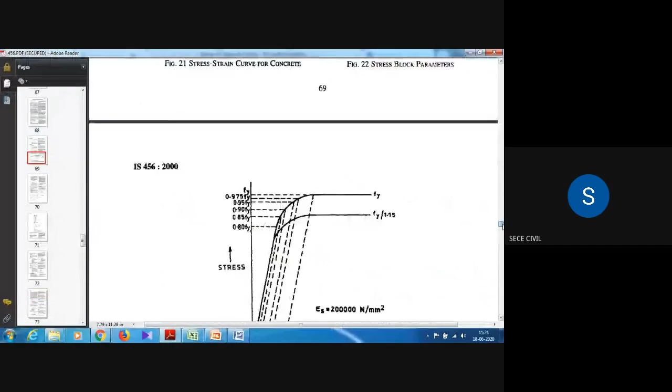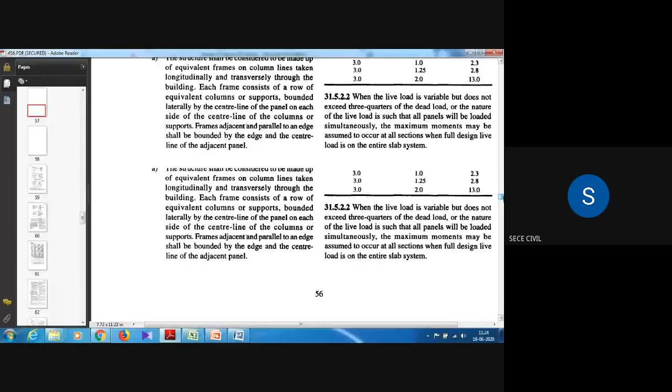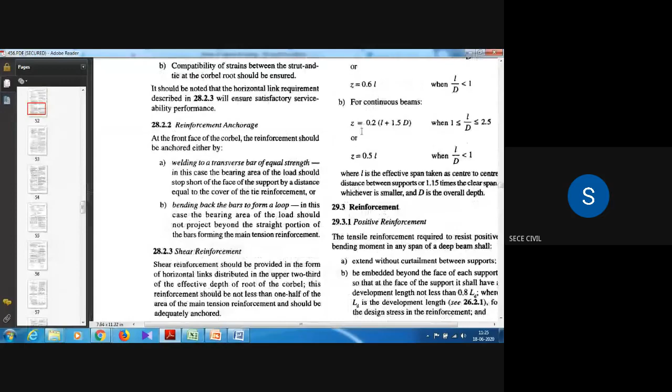So as per IS 456-2000, clause 26.5.3.2, we have certain norms for providing ties. I will show you that in the code book. Clause 26.5.3.2, here: pitch and diameter of lateral ties.

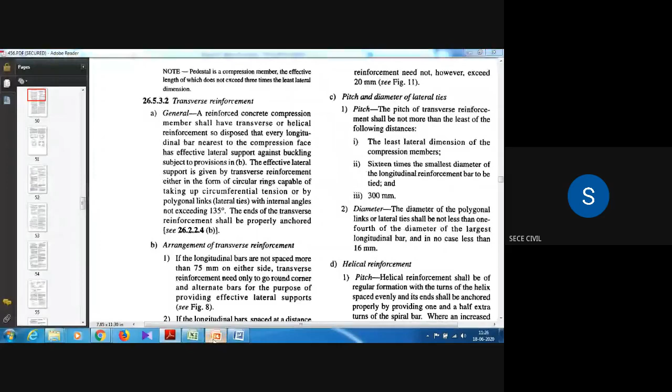The pitch of the transverse reinforcement shall not be more than the least of the following distances: the least lateral dimension of the compression member, 16 times the smallest diameter of the longitudinal reinforcement bar, or 300 mm. Out of these three values, it should not be more than the least. So 16 by 4 is 4 mm, and 6 mm. So we are providing 6 mm diameter ties.

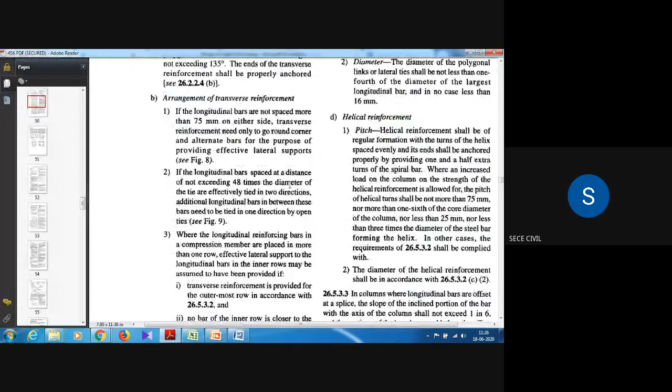Here, the diameter of the polygonal links or lateral ties shall not be less than 1/4 of the diameter of the largest longitudinal bar, and in no case less than 16 mm. They are mentioning it wrong: 6 mm, not 16 mm. So the diameter shall not be less than 1/4 of the diameter of the largest longitudinal bar. We are providing 16 dia only.

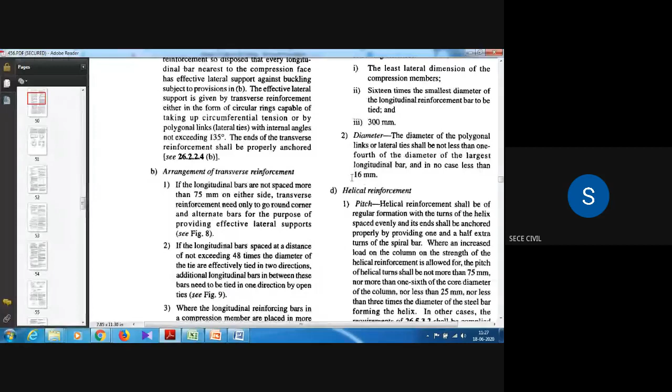We are providing 16 dia bars only. So 1/4 of 16 means 4, but we are providing 6 dia ties, and in no case less than 6, not 16. So that is why we are choosing 6 mm bar as tie reinforcement.

After that, pitch of the ties. The pitch is the spacing distance only. For that also we have the code book. The pitch of the transverse reinforcement shall not be more than the least of the following three points. The first point, the least lateral dimension of the compression member.

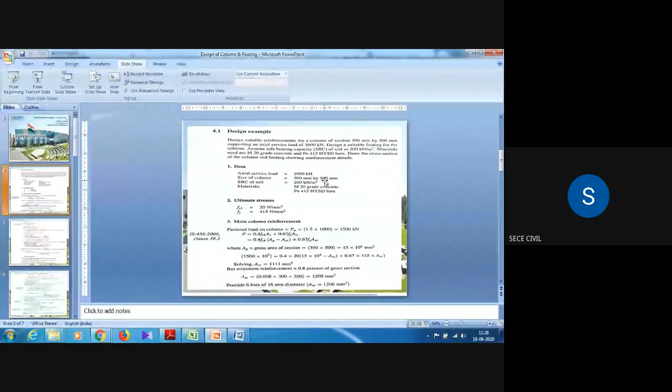For our problem, the size of the compression member is 300 by 500 mm, as given in the question. So the least dimension is 300 mm. Second point, 16 times the smallest diameter of the longitudinal reinforcement. We are providing 16 mm dia bars, so 16 into 16 is 256 mm. And the third value is 300. So out of these three values, the least value is 256.

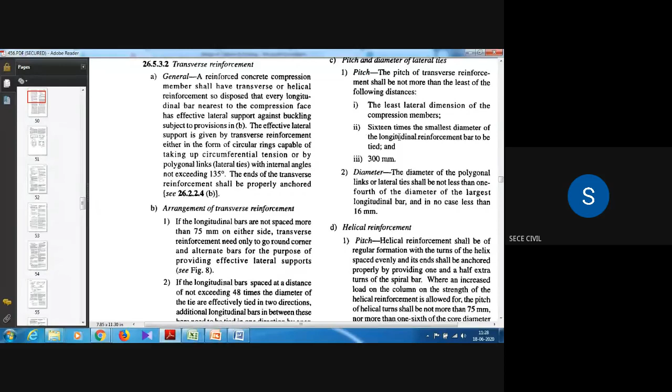So the pitch of the transverse reinforcement shall not be more than the least of the following. 256 is the least, so it should not be more than 256. Hence, we are providing 250 mm. So the pitch of the tie is 250 mm. Hence adopt 6 mm ties at 250 mm center to center.

So far we designed the main column reinforcement and tie reinforcement. Only two steps we completed. In main column reinforcement, first we calculated the factored load.

So multiplying by 1.5, we are getting 1500 kilonewton, and after that we are calculating the axial load acting on the column by using the formula 0.4 fck Ac plus 0.67 fy Asc. It is in the code book IS 456 2000, clause 39.3.

So in this we are calculating the area of steel reinforcement and we are calculating the minimum reinforcement. Minimum reinforcement is more when compared to the calculated area of steel reinforcement. So we are choosing minimum reinforcement and we are adopting 6 numbers of 16 mm dia bar, and for that the area of steel reinforcement is 1206 mm square.

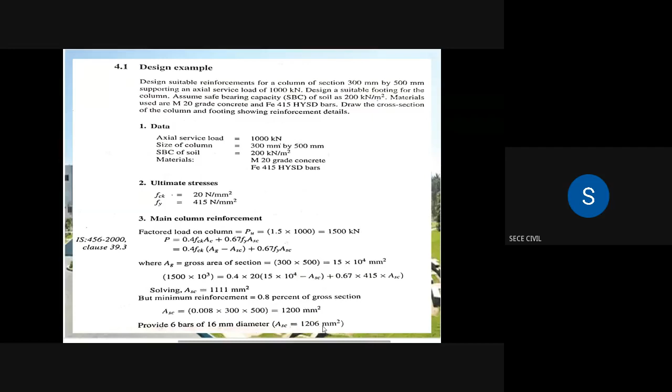After that we calculated the reinforcement for ties. Ties is nothing but horizontal shear reinforcement. If we provide the shear reinforcement vertically, that is stirrups. Normally stirrups are in beams only. In columns we name it as ties.

So next step is size of footing. We know that the load acting on the column is 1500 kilonewton. This was already given in the question itself. Then self weight of the footing. Self weight of footing is 10% of the load on the column. So 10% means 1500 into 10 by 100, so we are getting 150 kilonewton.

Therefore, total ultimate load is equal to, adding these two, 1500 plus 150, and we are getting 1650 kilonewton. After calculating total ultimate load, next we are calculating the footing area. Footing area is total ultimate load divided by 1.5 into 200. This 200 is the safe bearing capacity of the soil. So 1.5 times of 200. We are getting footing area as 5.5 meter square.